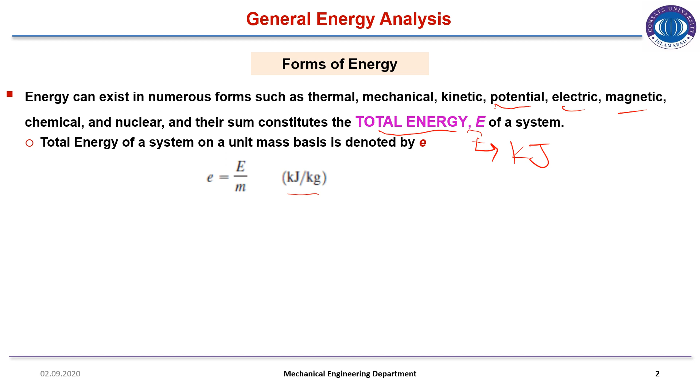Thermodynamics deals with the change of total energy, that is ΔE or Δe, energy per unit mass, or you can call it specific energy as well. The concept of macroscopic and microscopic forms of energy was also discussed in the previous lectures. Macroscopic forms of energy are those a system possesses as a whole with respect to some outside reference frame, for example, kinetic and potential energy. Kinetic and potential energies are the macroscopic forms of energy.

Microscopic forms of energy are those related to the molecular structure of the system and the degree of the molecular activity. Internal energy is represented with the symbol capital U. The sum of all the microscopic forms of energy is known as internal energy. You have to remember that capital U is the internal energy, and there is also a small u, that is capital U divided by mass.

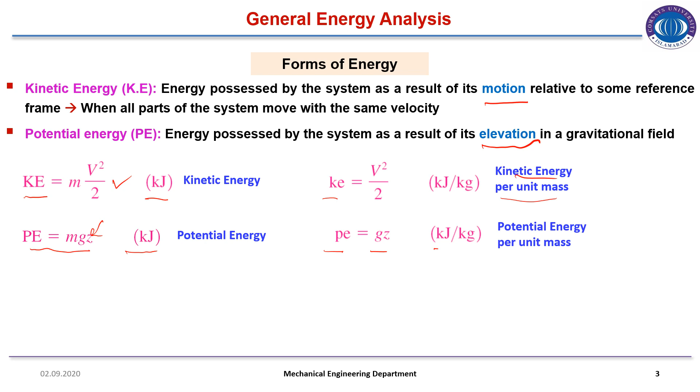Potential energy: energy possessed by the system as a result of elevation in a gravitational field is known as potential energy. The formula for potential energy is mass into gravitational acceleration multiplied by elevation. Z represents elevation. The unit for potential energy is kilojoule. The potential energy per unit mass is represented by small pe, that is g into z, and its unit is kilojoule per kg.

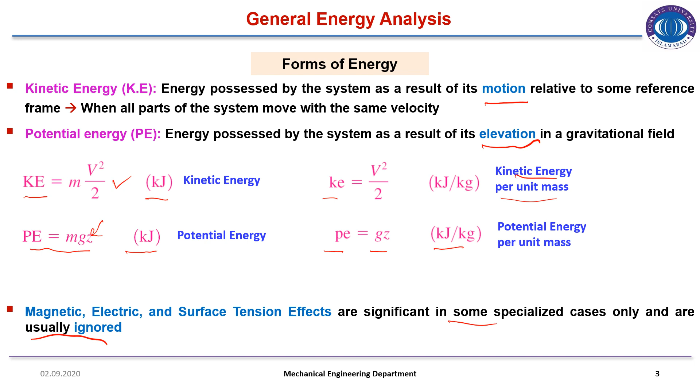Magnetic, electric, and surface tension effects are significant in some specialized cases only and are usually ignored, so they will be ignored in our problems. So now we know that there is internal energy, kinetic energy, and potential energy. Therefore, the total energy of the system is equal to internal energy plus kinetic energy plus potential energy, with their individual formulas on the right hand side, and the unit is kilojoule. Similarly, the energy of the system per unit mass can also be written in this form, and its unit is kilojoule per kg.

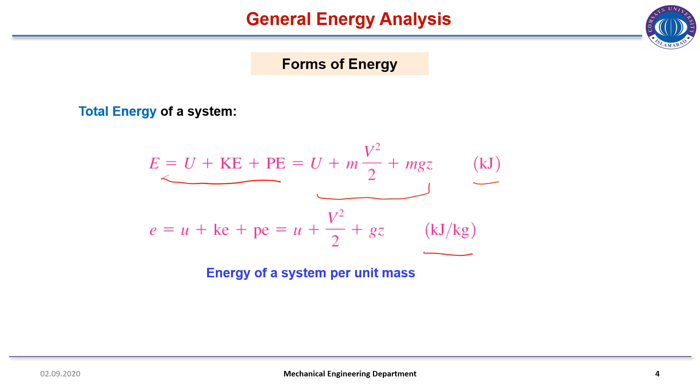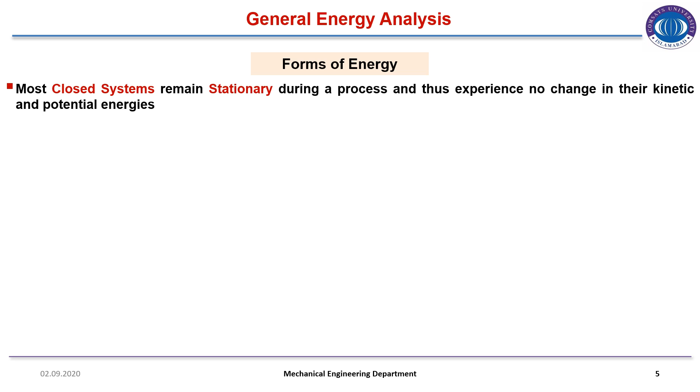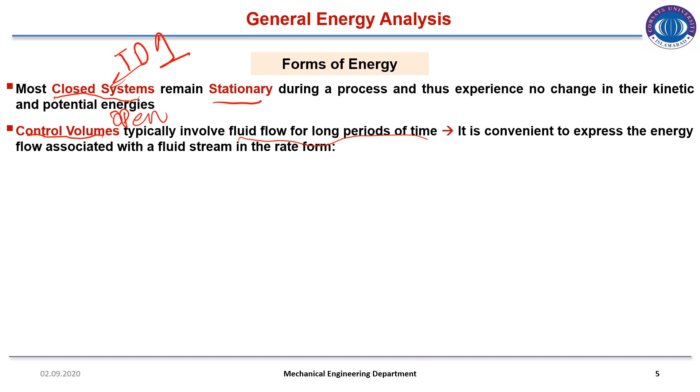Most closed systems remain stationary during a process and thus experience no change in their kinetic and potential energy. You have already studied the closed system in Thermodynamics 1, which usually remains stationary. But in a control volume or open system, mass is continuously flowing in and out of the system. Therefore, they typically involve fluid flow for long periods of time. It is convenient to express the energy flow associated with a fluid stream in rate form, meaning with respect to time.

So rho is the fluid density, A is the cross sectional area of flow, and V is the average flow velocity normal to AC. Here you must know that this is the volume flow rate. Okay, I will write it here. Okay, you should know that this is not velocity, this is volume flow rate, and that is velocity.

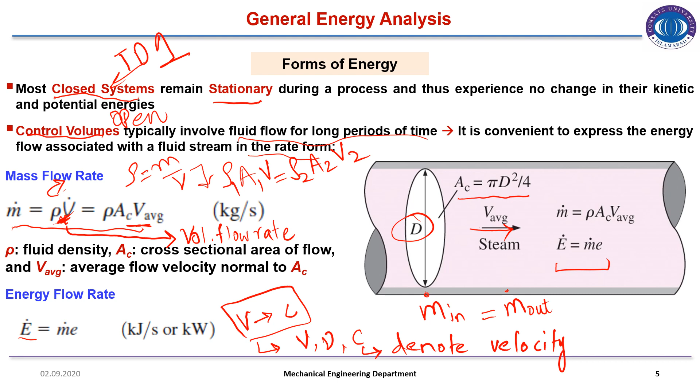Many engineering systems are designed to transport fluid from one location to another at specified flow rate. You know that the flow rate is mass flow rate represented by m dot, velocity represented by c, elevation difference represented by z. And the system may generate mechanical work in the turbine, or it may consume mechanical work in pump or fan

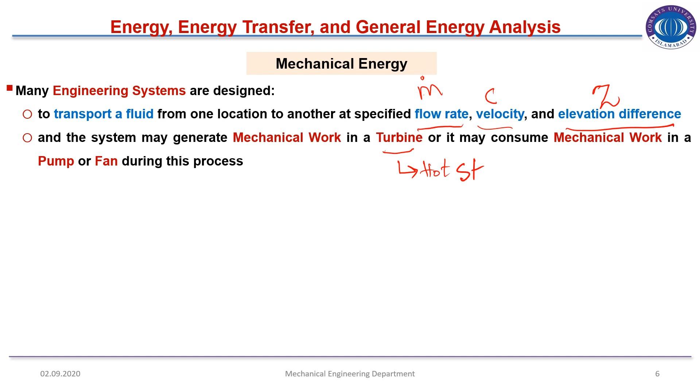during this process. So you know that in turbine the hot steam flows through the blades of the turbine, and in pump the pressure of the fluid is increased from P1 to P2. That's the low pressure fluid enters into the pump, and the pressure of the fluid is increased many times.

Such systems can be analyzed conveniently by considering the mechanical form of energy only and the frictional effects that cause the mechanical energy to be lost in the form of thermal energy. You know that during any mechanical process friction effects are also present, and friction force usually transforms into heat.

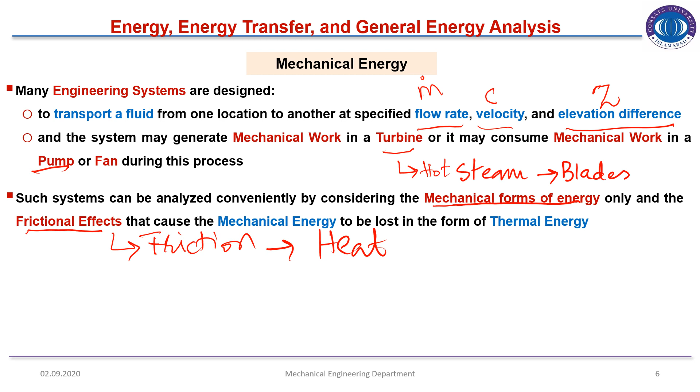Mechanical energy is the form of energy that can be converted to mechanical work completely and directly by an ideal mechanical device such as an ideal turbine. So mechanical energy can be converted into mechanical work. It means 100% we can convert mechanical energy into mechanical work, through a device like an ideal turbine.

So if we have 100 joules of mechanical energy, then it will give 100 joules of mechanical work. However, this case is not possible for thermal energy. In the later section, we will come to know that 100% thermal energy cannot be converted into mechanical work, whereas 100% mechanical energy can be converted into mechanical work.

Next is kinetic and potential energies. These are the familiar forms of mechanical energy, which we have discussed in the previous slide as well. A pump transfers mechanical energy to a fluid by raising its pressure. So it's the working of pump that it raises the pressure of the fluid flowing through it. And turbine extracts mechanical energy by dropping its pressure. So turbine and pump are opposite forms of mechanical devices. Pump raises the pressure, whereas turbine drops the pressure.

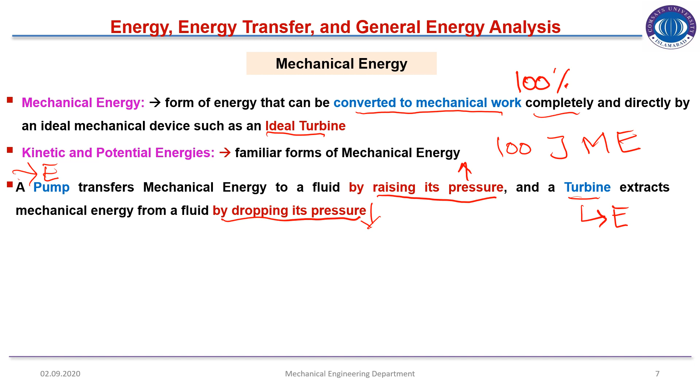We have to supply energy as input to the pump to raise the pressure of the fluid, whereas turbine gives out energy by dropping the pressure of the fluid that is flowing through it. Pressure of the flowing fluid is also associated with the mechanical energy. Unit of pressure is Pascal, and there are different conversion units of Pascal as well.

So energy per unit mass, so that is pressure and that is specific volume. So you know that density is equal to mass over volume. So volume is equal to mass over density. So specific volume equals 1 over density, which is written here.

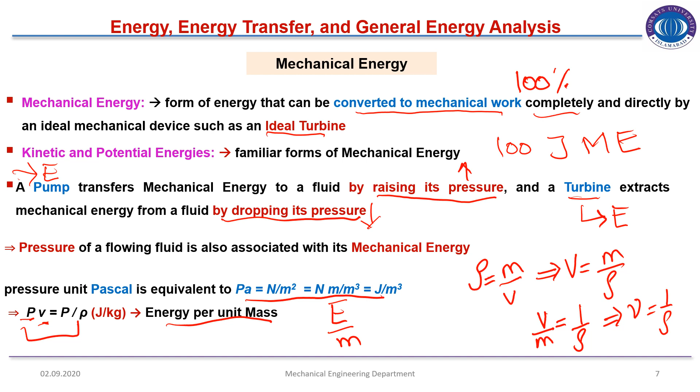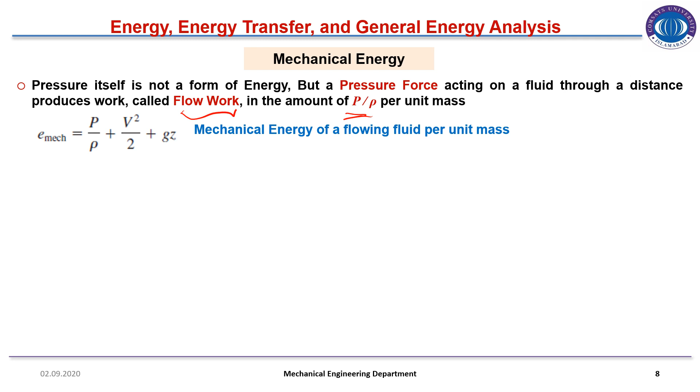Pressure itself is not a form of energy, but a pressure force acting on a fluid through a distance produces work, called flow work, in the amount of P over rho per unit mass. You know that Pv is equal to P over rho, since specific volume equals 1 over density. So the Pv flow work is denoted by P over rho.

So this is the total amount of energy. This is the flow work due to the pressure force. This is due to the velocity, or you can say that it is the specific kinetic energy. This is the specific potential energy. I will write it, kinetic energy, and that is specific potential energy.

So the total rate of energy is represented by capital E. I will remove that. Capital E is a rate, mechanical energy rate, which is equal to mass flow rate into specific energy. So we have multiplied that with mass flow rate, and the rate of energy of a flowing fluid is represented by mass flow rate into flow work, kinetic energy, and potential energy. It is a sum of all forms of mechanical energy.

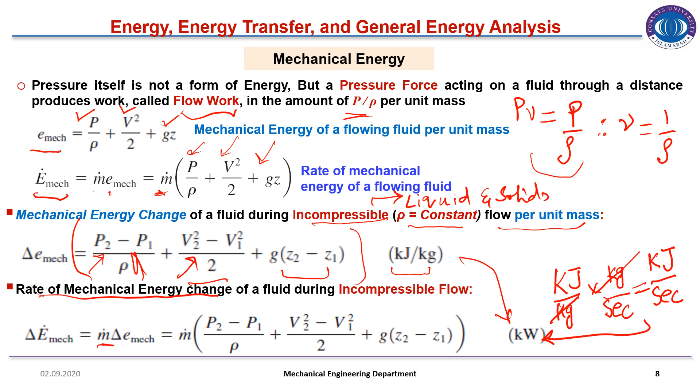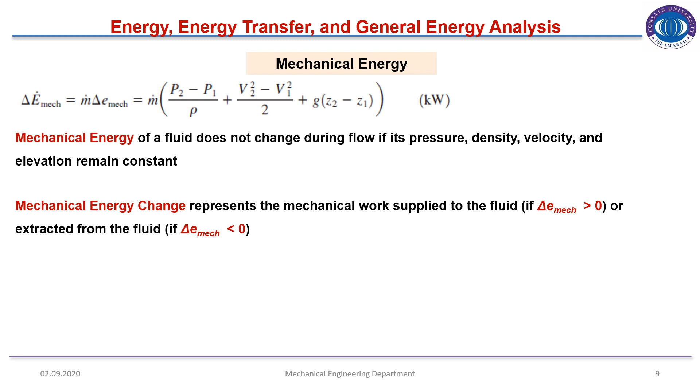Mechanical energy of fluid does not change during the flow if its pressure, density, velocity, and elevation remain constant. Mechanical energy change represents the mechanical work supplied to the fluid if change of mechanical energy is greater than zero, or extracted from the fluid if change of energy is less than zero.

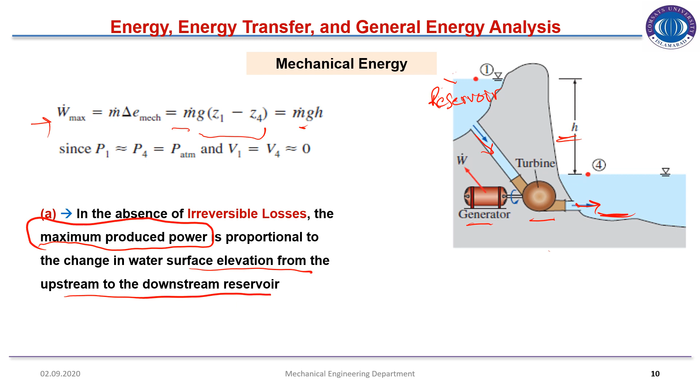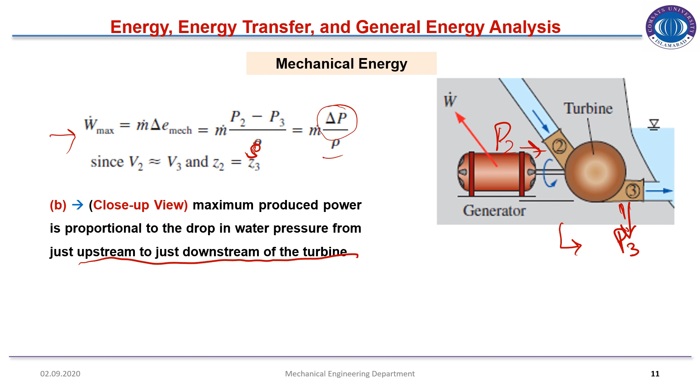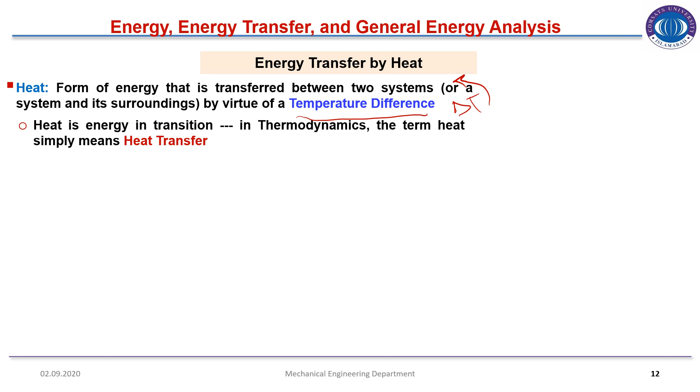Energy transfer by heat. Heat is a form of energy that is transferred between two systems, or a system and its surroundings, by virtue of temperature difference. So as discussed previously, temperature difference is the driving force in thermodynamics. Heat is energy in transition. In thermodynamics, the term heat simply means heat transfer.

So there are 3 cans of soda, as you can see in this picture. The temperature of the first can is 25 degrees centigrade, the second can is 15 degrees centigrade, and the third can is 5 degrees centigrade, whereas the ambient or room air temperature is 25 degrees centigrade. So heat will flow from the warm body to the cold body, that is, heat flows from the room into the soda bottle.

So the amount of heat that flows into the 5 degree centigrade bottle is 16 joule per second. The rate of heat flowing into the 15 degree centigrade soda bottle is 8 joule per second, whereas no heat will transfer into the soda can that is at 25 degree centigrade. So it is mentioned here that temperature difference is the driving force for the transfer. That is a very important sentence and usually asked in MCQs as well.

The larger the temperature difference, the higher the rate of heat transfer. As you can see, the temperature difference between the room air and this soda can is maximum, so the rate of heat transfer is highest in this scenario. Whereas in the second can, the rate of heat transfer is 8 joule per second, which is less than the first one, and there is no heat transfer in the third case.

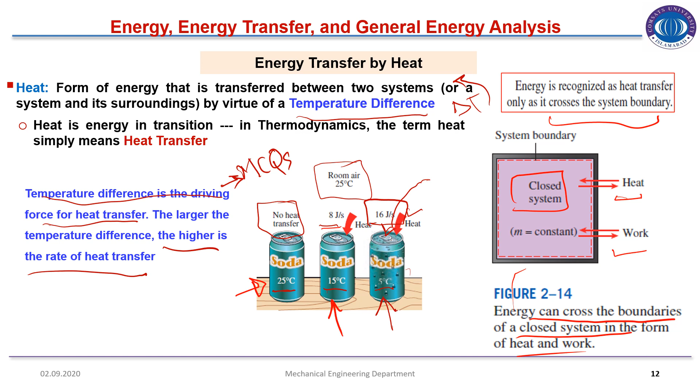A process during which there is no heat transfer is called an adiabatic process. So in an adiabatic system there is insulation. This insulation will prohibit all the heat, none entering or leaving this system. There are two ways a process can be adiabatic. Either the system is well insulated so that only a negligible amount of heat can pass through the boundary, or both the system and surroundings are at the same temperature and therefore there is no driving force. The temperature difference for heat transfer is zero.

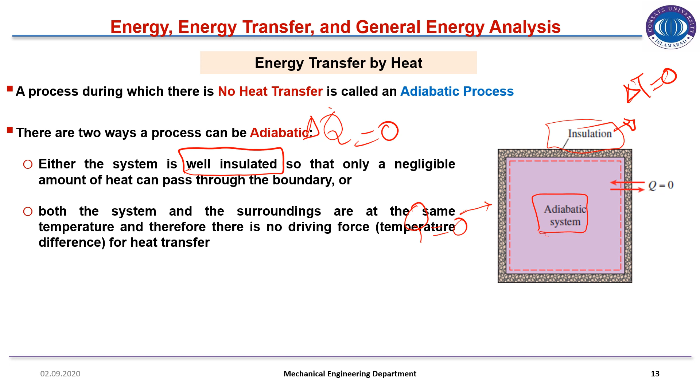So it is saying that either you have an absolute insulation which prohibits all the heat transfer, or if the temperature difference is zero, then there will be no heat transfer and the system is said to be an adiabatic system. Q is equal to delta Q is equal to 0. So you know that the adiabatic system is that in which there is no heat transfer. Even though there is no heat transfer during an adiabatic process, the energy content and thus the temperature of the system can still be changed by other means such as work, turbine and pump. So you must remember, if asked, the turbine and pump are adiabatic devices.

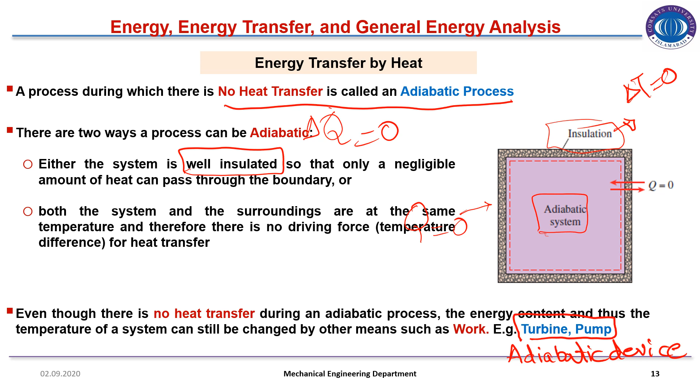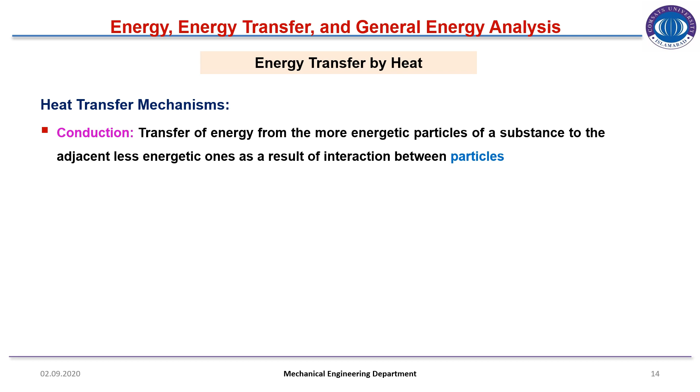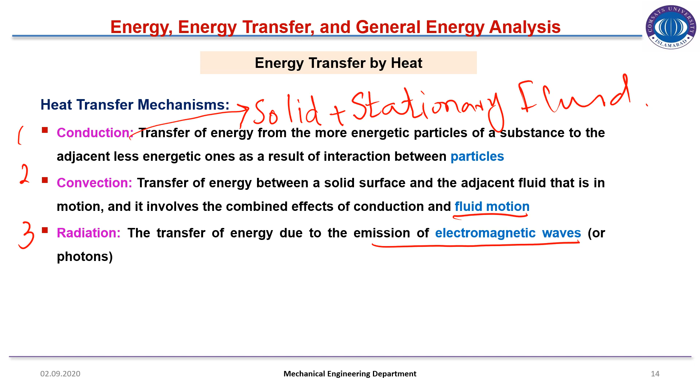Heat transfer mechanism. There are mainly three modes of heat transfer: conduction, convection, and radiation. Conduction is heat transfer through solids and stationary fluids. Convection is the process of heat transfer in a fluid in motion, and radiation is the transfer of energy due to emission of electromagnetic waves. So you must remember that for the first and second a medium is necessary, whereas for the third no medium is required.

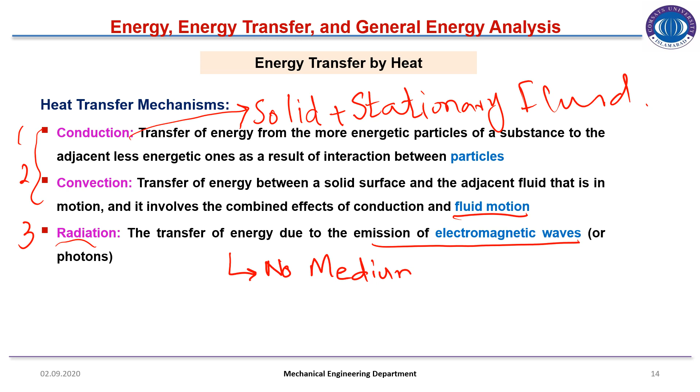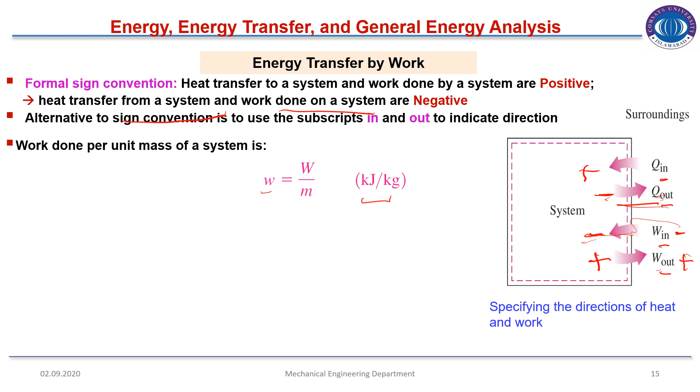So work done per unit mass of the system can be written as small w is equal to capital W divided by mass. The unit of work done per unit mass is kilojoule per kg. Work done per unit time is called power, denoted by W dot, and the unit is kilojoule per second. Power is the work done per unit time, represented by the unit of kilowatt.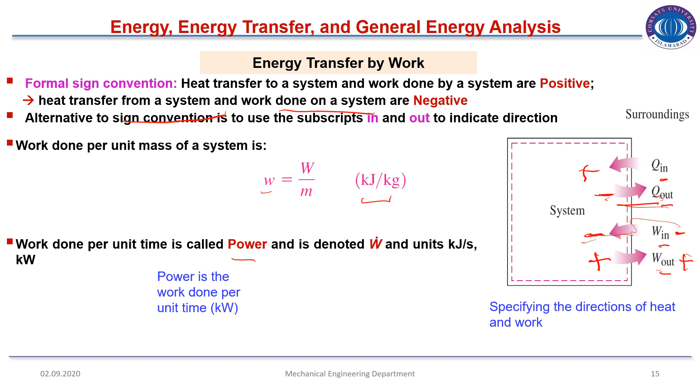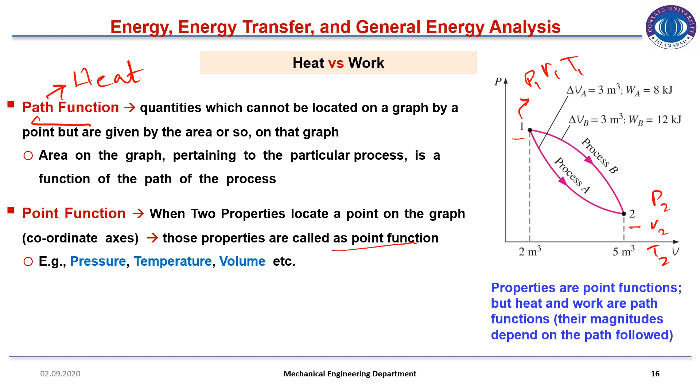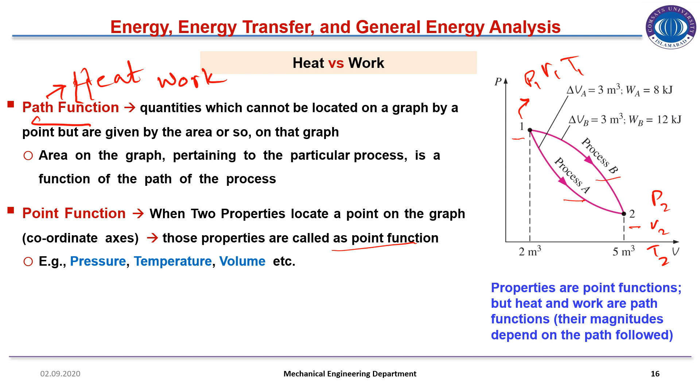These are two examples of path functions that require the path followed by the process in reaching state 2 from state 1. So path A has different values for heat and work, and process B, which starts from state 1 to state 2, has different values of heat and work.

Both heat and work are boundary phenomena. Both are associated with a process, not a state. Therefore, both are path functions. Their magnitude depends on the path followed during the process as well as the end states. Path functions have inexact differentials designated by the symbol partial. Differential amounts of heat and work are represented by partial Q and partial W respectively instead of dQ and dW.

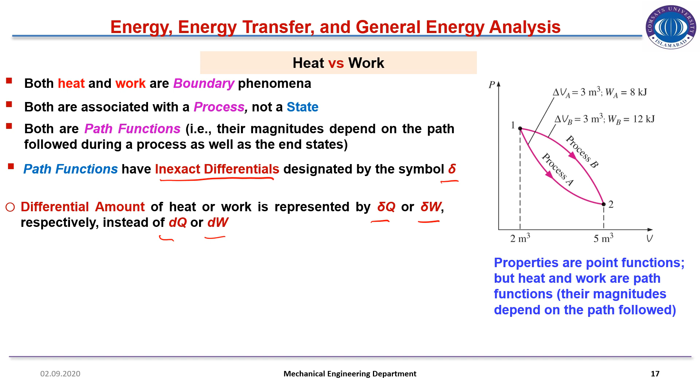As volume is a point function, it can be represented by delta V, the change in volume from state 1 to state 2. Volume change during process 1 to 2 is always the volume at state 2 minus the volume at state 1, regardless of the path followed. Whereas you cannot calculate heat and work with delta Q or delta W. That is incorrect.

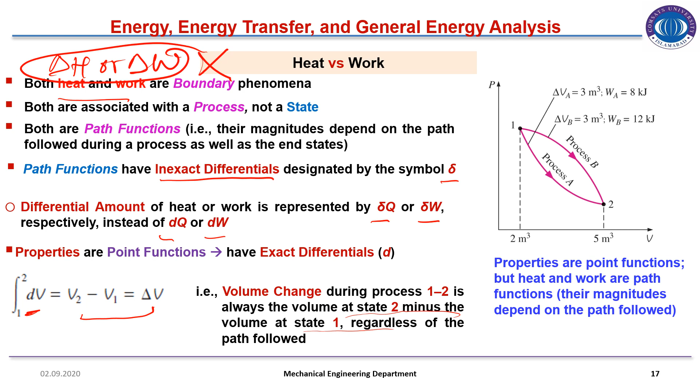The first law of thermodynamics for a control mass undergoing a cycle. For a cyclic process, that is the symbol for cyclic process, partial Q is equal to partial W. Mathematically, the first law is expressed as the cyclic integral of partial Q equal to the cyclic integral of partial W. The cyclic integral of heat transfer represents the net heat transfer during the cycle, whereas the cyclic integral of partial W represents the net work done during the cycle.

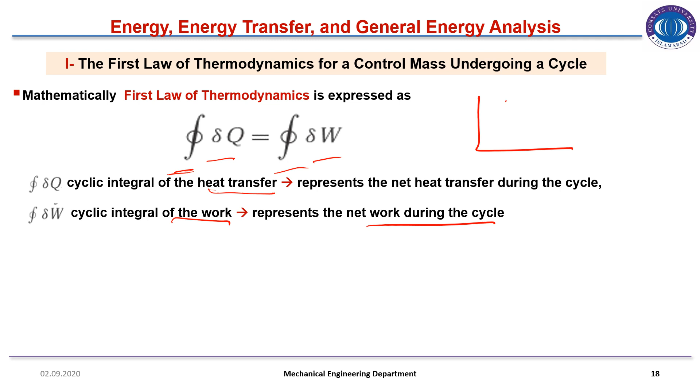So what is a cyclic process? We have already discussed state 1 to state 2. If the process goes back to its initial state, then it is known as a cyclic process. When a system undergoes a thermodynamic cycle, the net heat supplied to the system from its surroundings plus the net work input to the system from its surroundings must equal 0.

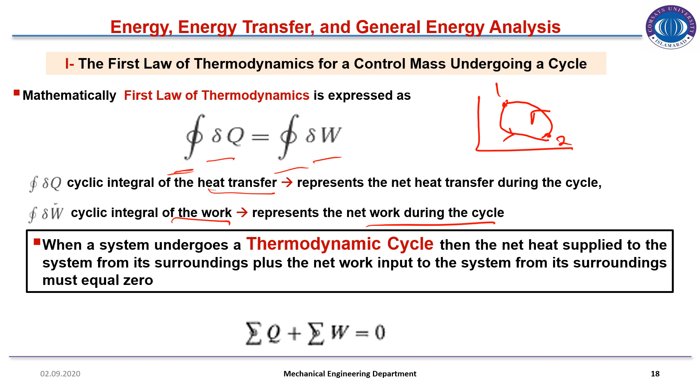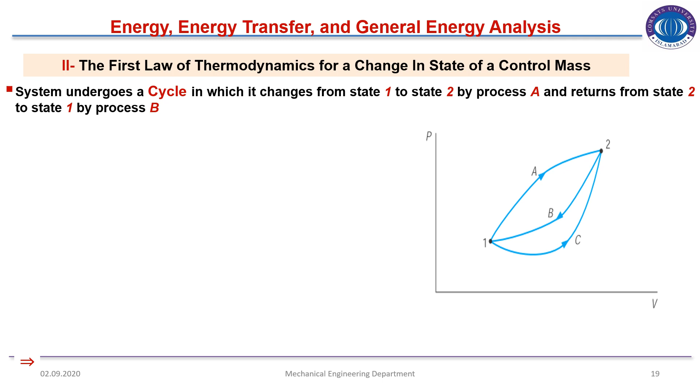From the first law of thermodynamics, this is the mathematical form. These are two separate processes. First, through process A, the state will change from 1 to 2, and through process B, it will come back from state 2 to 1. In the second, the change of state from 1 to 2 is through process C, and then again coming back from 2 to 1 through process B.

So by the first law of thermodynamics, partial QA plus partial QB is equal to partial WA plus partial WB. For the second process, partial QC plus partial QB is equal to partial WC plus partial WB. Both are valid as they are both cyclic processes, so the first law can be applied to them. Subtracting the second equation from the first, QB cancels out, and QA minus QC is equal to WA minus WC.

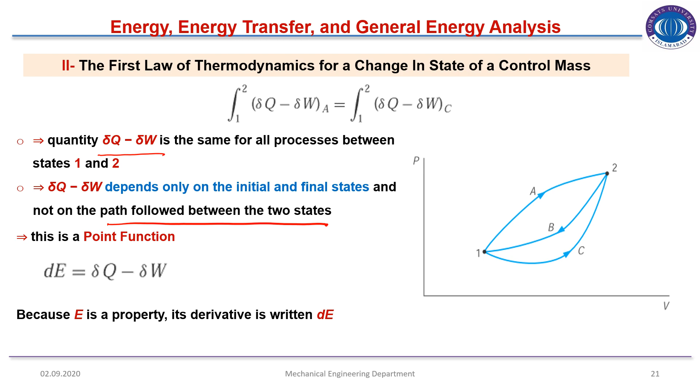Because E is a property, its derivative is written as dE. So dE is equal to partial Q minus partial W. As you can see, this is a point function, whereas those are path functions. So the point function is written as dE here, and with path functions we have to use the partial sign because they are inexact differentials, whereas point functions are exact differentials. Therefore you can find the value at the state.

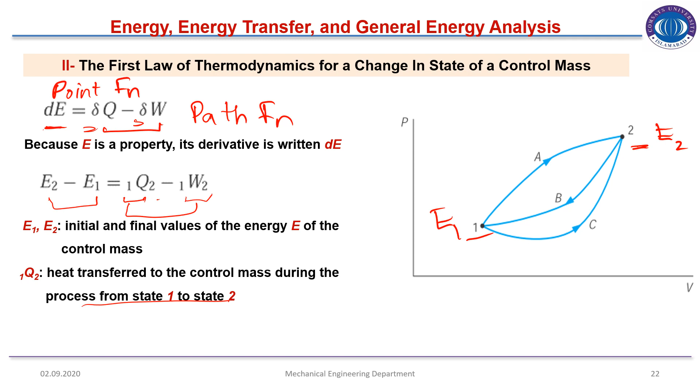So the energy at state 2 will be E2, and at state 1 is E1. Their values can be calculated from Q, the heat transferred, and W, the work done or obtained when going from state 1 to 2. E1 and E2 are the initial and final values of the energy of the control mass, Q1 to 2 is the heat transfer to the control mass during the process from state 1 to 2, and W1 to 2 is the work done by the control mass during the process.

So the next topic is regarding the ideal gas equation.

This is known as the ideal gas equation. PV is equal to N R bar T, where R bar is the universal gas constant, and it can be converted into the specific gas constant. The relation is PV is equal to mRT.

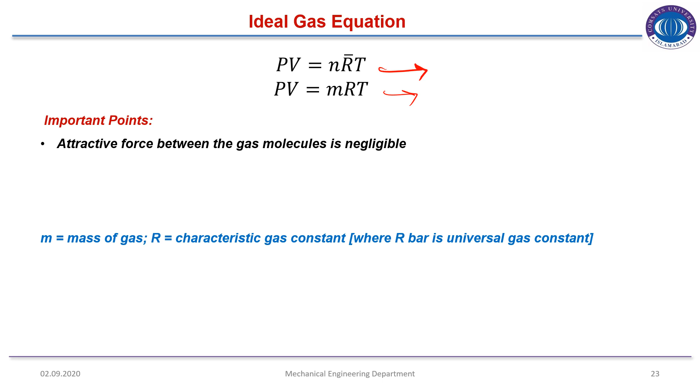The important points to remember are: attractive force between the gas molecules is negligible. Volume of individual particles is negligible as compared to the overall volume of the gas. Okay. A hypothetical gas or ideal gas obeys this law at all temperatures and pressures.

This equation, PV is equal to mRT, is also known as the equation of state, where m is the mass of gas, R is the characteristic gas constant for the particular gas, and R bar is the universal gas constant. The value of R bar is 8.314.

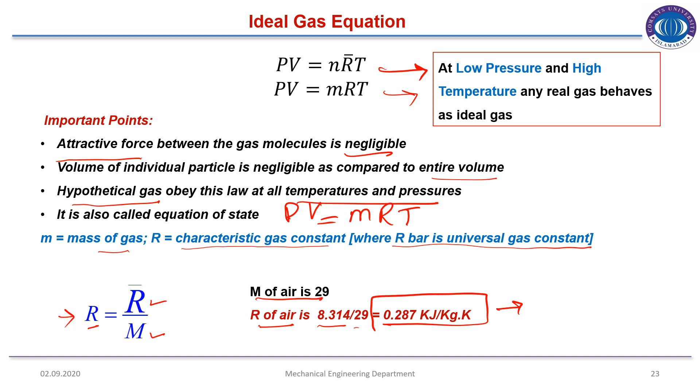Okay, this characteristic constant can be calculated by this formula. R is the characteristic gas constant, R bar is the universal gas constant, and M is the molar mass of the gas. For air, the molar mass is 29, and the gas constant is R bar divided by molar mass. The characteristic gas constant for air is 0.287 kJ per kg Kelvin. Students must remember this value; it will be used later on in the problems as well.

So there is the isochoric process. What is an isochoric process? A constant volume process. When a gas is stored in a rigid container, we say that it is an isochoric process. So we will apply the isochoric process to the ideal gas equation, or equation of state, that we have just discussed in the previous slide.

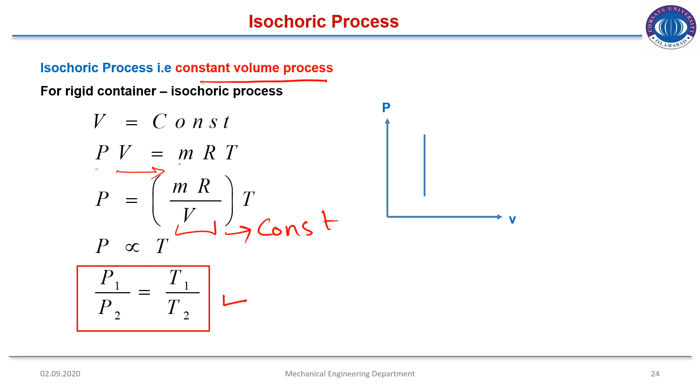P is proportional to T. So all the values that are constant, we will put them on the right side. So P over T we will write, because it is constant. So when that is constant, we can write P1 over P2 is equal to T1 over T2. In the PV diagram for the isochoric process, it is a straight line parallel to the y-axis.

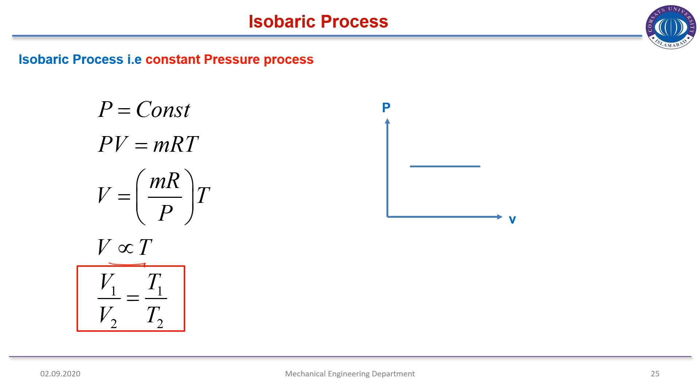Isobaric process. The isobaric process is a constant pressure process. From the equation of state, V is equal to mR over P into T, so V is directly proportional to T. V1 over V2 is equal to T1 over T2. In a PV diagram, the isobaric process is a straight line parallel to the x-axis.

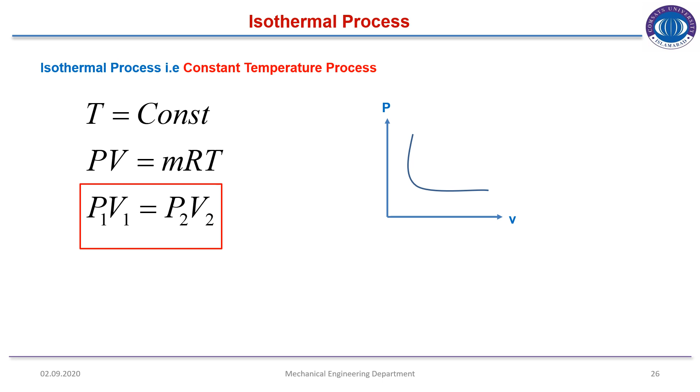Isothermal process. It's a constant temperature process. T is equal to constant. So the equation of state is reduced to PV is equal to mRT, the right side is constant. So P1 V1 is equal to P2 V2. In a PV diagram, it is this type of curve, shown on the right hand side.

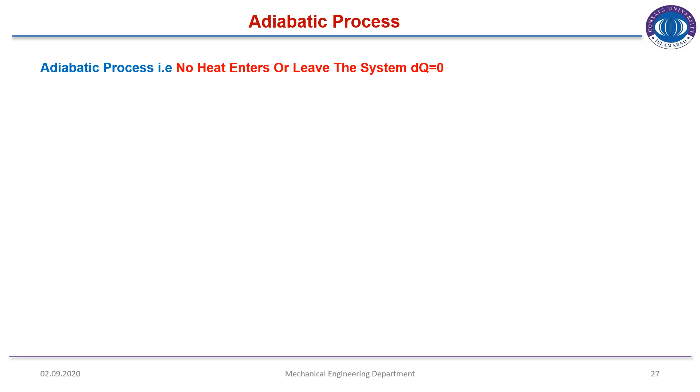Adiabatic process. No heat enters or leaves the system. dQ is equal to 0. The equation for the adiabatic process is PV gamma is equal to constant. So P1 V1 power gamma is equal to P2 V2 power gamma, where gamma is the ratio of specific heat at constant pressure to the specific heat at constant volume. We will discuss this in later slides: what is specific heat and what is its contribution in the open system.

So TV gamma minus 1 is equal to constant, therefore T1 over T2 is equal to V2 over V1 power gamma minus 1. So now here we give the next portion. So these are to remember. The results of these derivations we will use in problem solving. In Thermo 1 you have already derived all these equations, therefore I am not going into the details and am just discussing the results of these derivations.

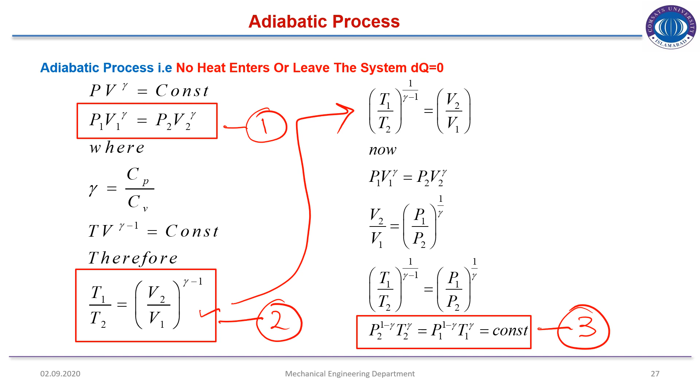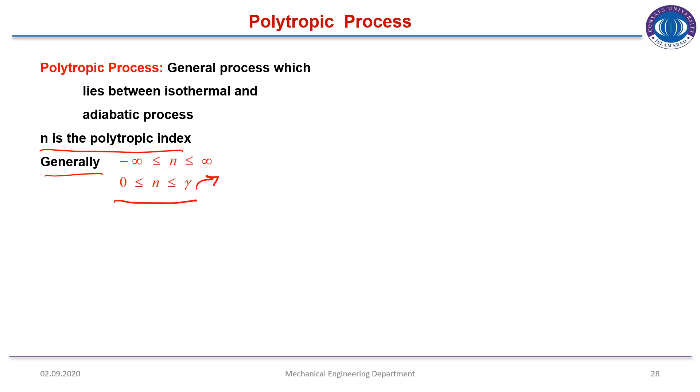So, polytropic process. What is a polytropic process? It's a general process which lies between the isothermal and adiabatic process. It is denoted by small n. Generally, the value of n lies between minus infinity and positive infinity. But during our discussion, the value of n will be between 0 and gamma. What is gamma? Gamma is the adiabatic index that we discussed in the previous slide. The value of gamma is the ratio of specific heats.

So P1 V1 power n is equal to P2 V2 power n. Therefore, T1 over T2 is equal to V2 over V1 power n minus 1. This is the same derivation that we have in the previous slide; we have just replaced gamma with n. So therefore the same results are obtained from the derivation. So here you can see that in the previous slide, that is P2 over P1 power 1 minus gamma, which is replaced by 1 minus n.

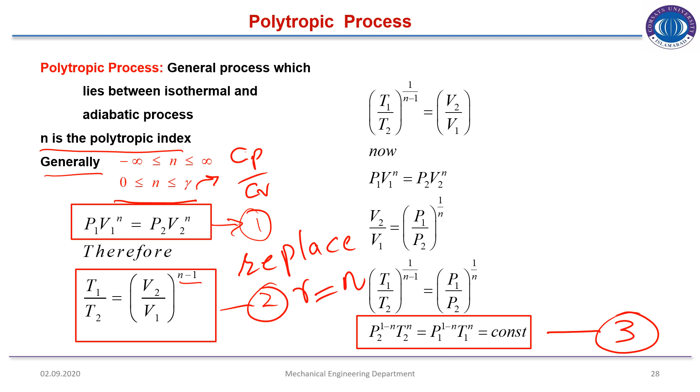PdV work, or displacement work transfer. In thermodynamics, work is done when the boundary of the system may expand or contract. So this is a piston and cylinder as shown. At state 1 the piston is to the right, and volume is reduced and pressure is increased from 1 to 2. So you can see that at 1 the pressure is lower, whereas at 2 pressure is increased and volume is decreased as well.

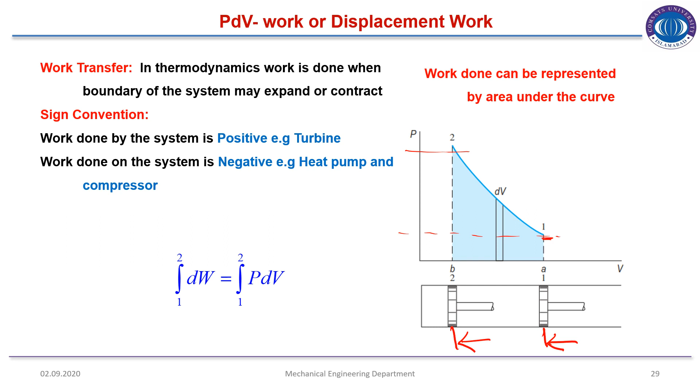Sign convention: work done by the system is positive, for example, a turbine. Work done on the system is negative, for example, a heat pump and compressor.

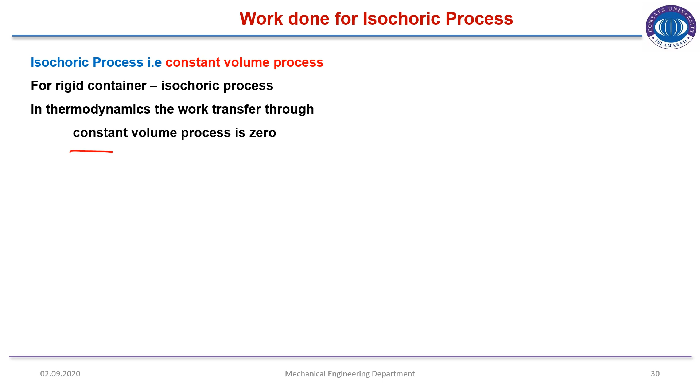So, work done for isochoric process. Isochoric process is a constant volume process. In thermodynamics, the work transfer through a constant volume process is zero. So work for a constant volume process is zero. This is an important statement which may be asked in the MCQs as well.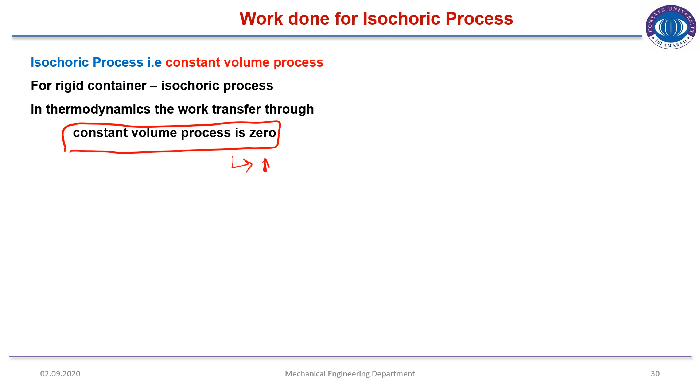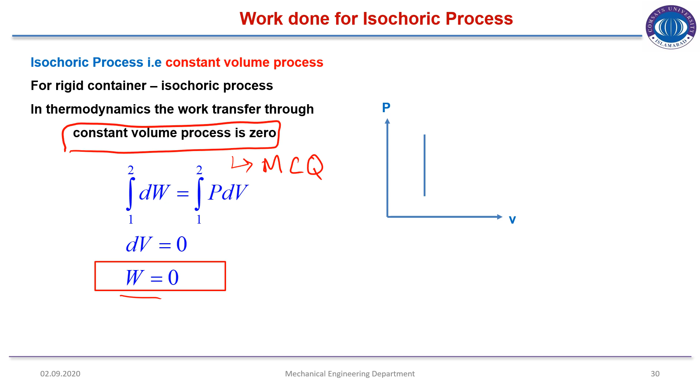Mathematically, work done is equal to PdV. The change in volume is equal to 0, therefore work is 0. And the PV diagram we have discussed in the earlier slide as well. It's a straight line parallel to the y-axis.

Work done for isobaric process. It's a constant pressure process. Therefore, the volume is changing, and the work done is equal to P into (V2 - V1). Work will be represented by this portion in the PV diagram. That will be V2, V1 and P.

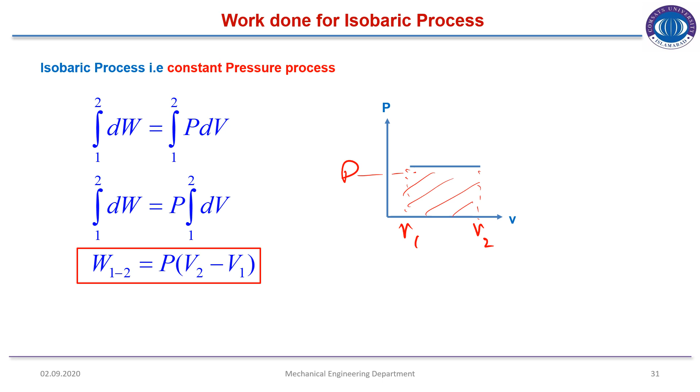Work done for isothermal process. Isothermal process is a constant temperature process. So the work done is represented by P1V1 ln(P1/P2); as P1V1 we can replace by mRT, because this is a constant temperature process, so mRT ln(P1/P2).

These derivations are included in Thermo 1. Therefore, I am not deriving these relations. I am just discussing the results of these processes.

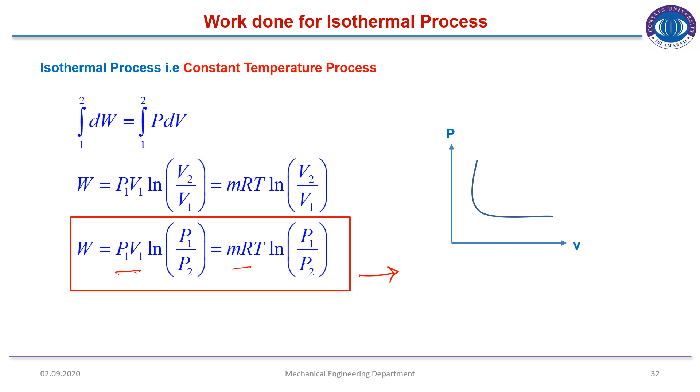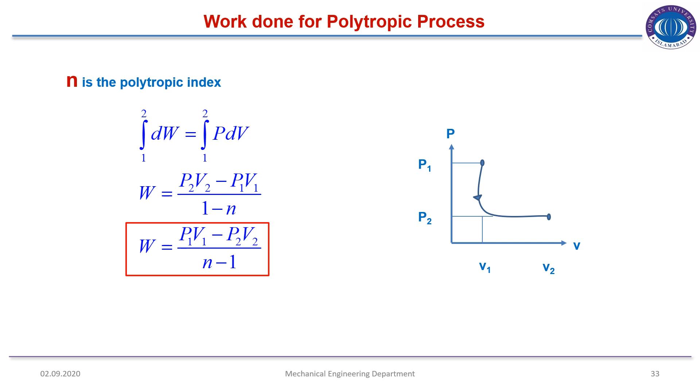Work done for polytropic process. n is the polytropic index, as we have discussed. So work done is represented by (P1V1 - P2V2)/(n - 1). On the right hand side you can see the PV diagram of the polytropic process, where you can see the pressure and volume change, with polytropic index n.

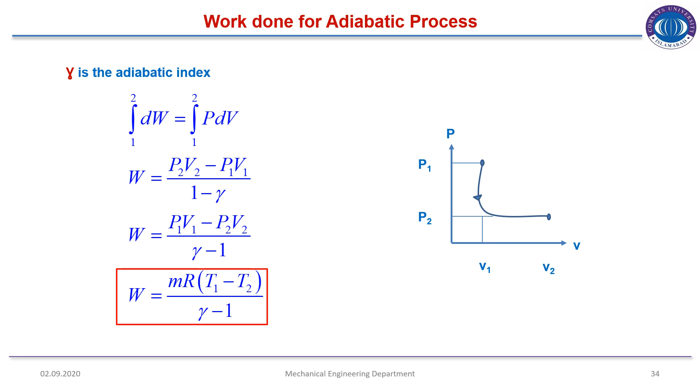Work done for adiabatic process. Gamma is the adiabatic index, and work done for adiabatic process is equal to mR(T1 - T2)/(gamma - 1). Similarly to the polytropic process, the adiabatic process is shown on the right hand side on the PV diagram. The change in pressure and volume you can see, and work done can be calculated for both.

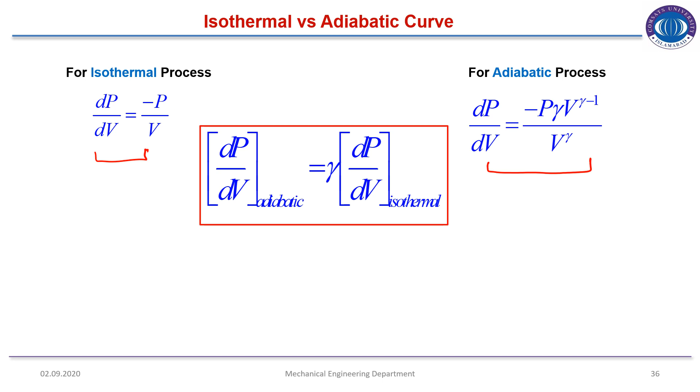So that is the slope of the isothermal process. This is the right hand side, that is the slope for the adiabatic process. So you can see that the slope of the adiabatic process is equal to gamma times the slope of the isothermal process. The above expression shows that the slope of the adiabatic curve is greater than the isothermal curve. That is, the adiabatic curve is steeper than the isothermal curve.

This is an important statement, and from the MCQ point of view, you should remember that the slope of the adiabatic curve is steeper than the isothermal curve.

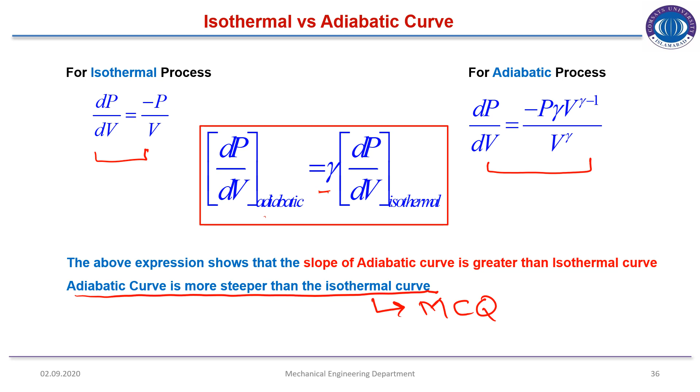The expression for the polytropic index is given as n equal to log(P1/P2) divided by log(V2/V1). Therefore, we now calculate the value of n for different processes. For isobaric process, the value of n is 0.

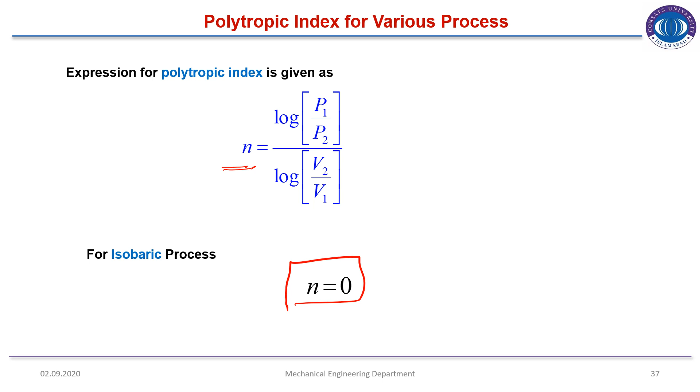Similarly, for isochoric process, the value of n is infinity. For isothermal process, the value of n is 1. For adiabatic process, n is replaced by gamma; n is equal to gamma.

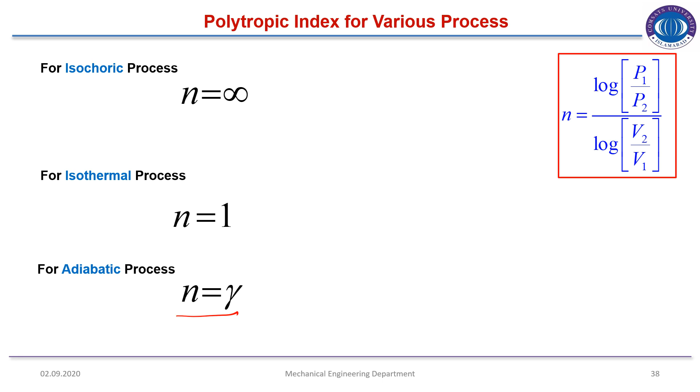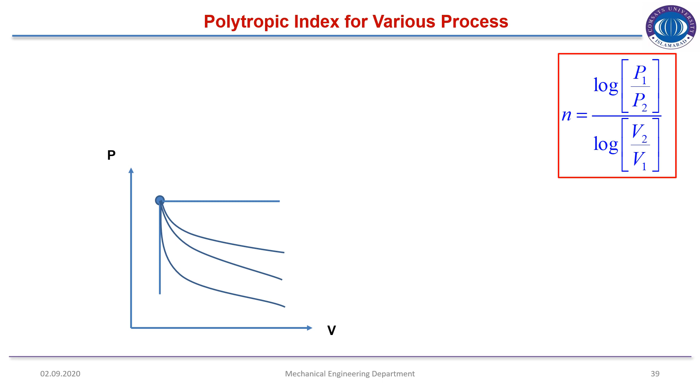So now, these are the different curves shown on the PV diagram. I want you to pause the video and just answer which curve depicts which process. So the first curve depicts the isobaric process, where n is equal to 0. It's a constant pressure process and is a straight line parallel to the x-axis.

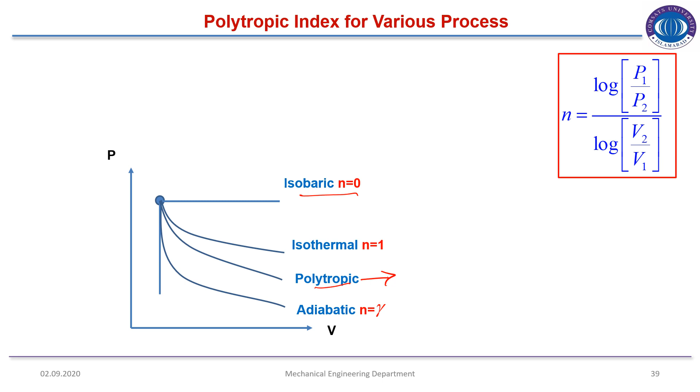For isothermal process, n is equal to 1. That is the curve for polytropic process, and adiabatic, n is equal to gamma. As I have said earlier, polytropic process is a general process which lies between isothermal and adiabatic process. From the curve you can see that this process lies between isothermal and adiabatic process.

And the last is isochoric process, where the value of n is infinity. Isochoric process is a constant volume process, which is a straight line parallel to the y-axis on the PV diagram.